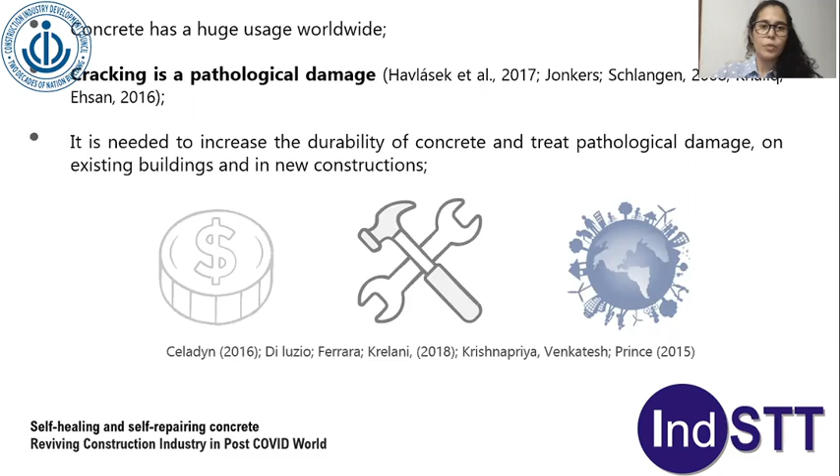Concrete has huge use worldwide, and cracking is a pathological damage that may lead to severe deterioration. There's a need to increase durability to save money, avoid reworks, and make structures sustainable. Studies of mechanisms that can act on concrete, creating products that heal cracks, led us to self-healing and self-repairing concrete.

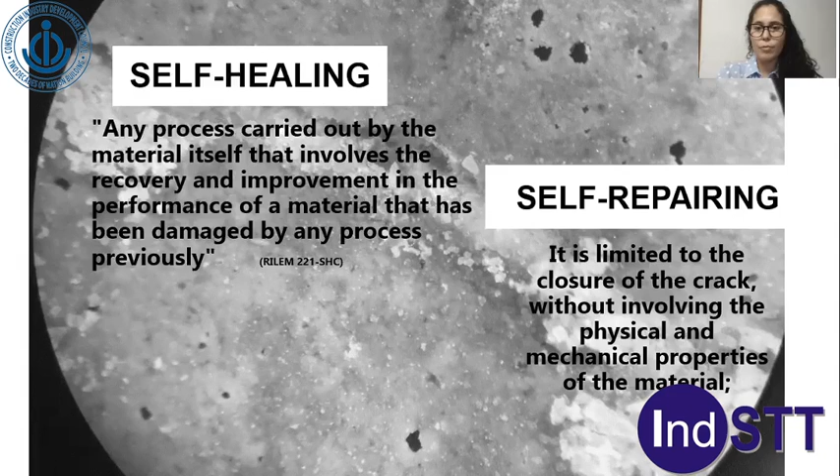These are divided because self-healing is considered as any process carried out by the material itself that involves recovery and improvement in the performance of material damaged by a previous process. Self-repairing is limited to closure of the crack, and doesn't involve physical or mechanical properties.

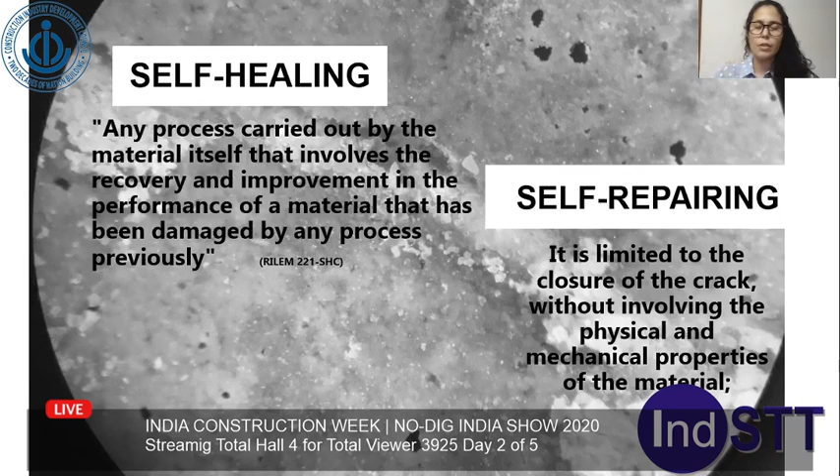Self-healing mechanisms can be autogenic or autonomous. Autogenic uses materials already in concrete, like cement or pozzolanic materials. Autonomous involves putting materials into concrete specifically for healing capability, like chemical compounds or bio solutions. This classification is based on the materials needed for the process.

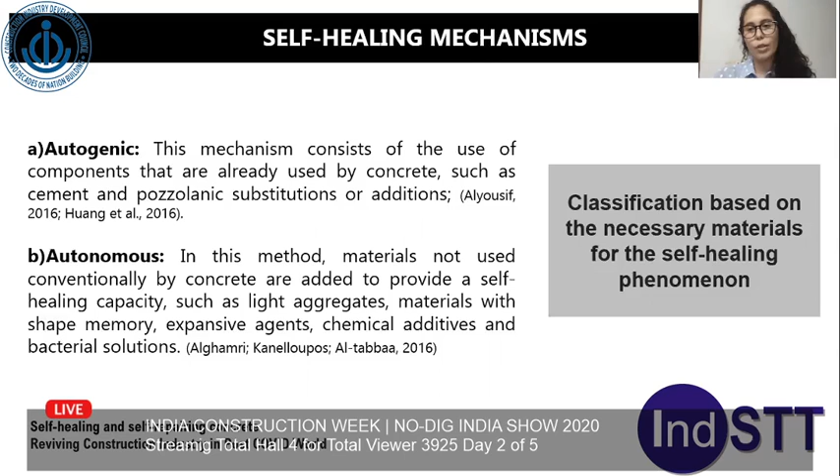Mechanisms have requirements to occur. There's a need to evaluate if they work in real structures or real exposure conditions. There's influence of curing conditions, need for analysis of reliability, and whether the mechanism can work in multiple cracking. Different mechanisms have different maximum crack thickness they can work within.

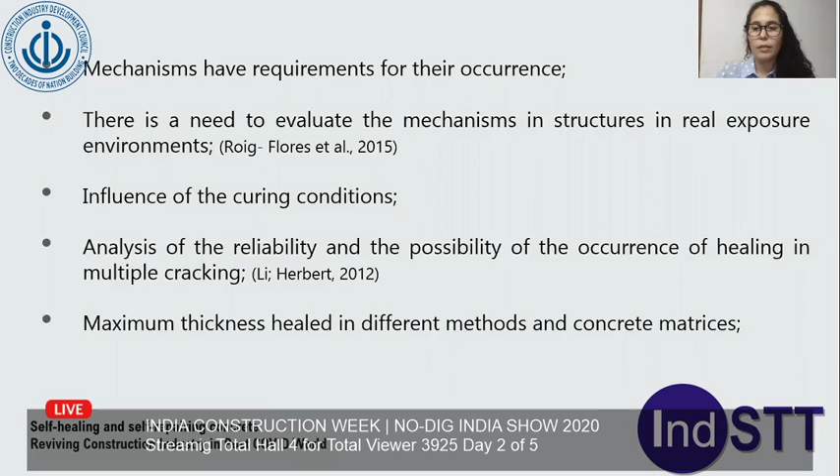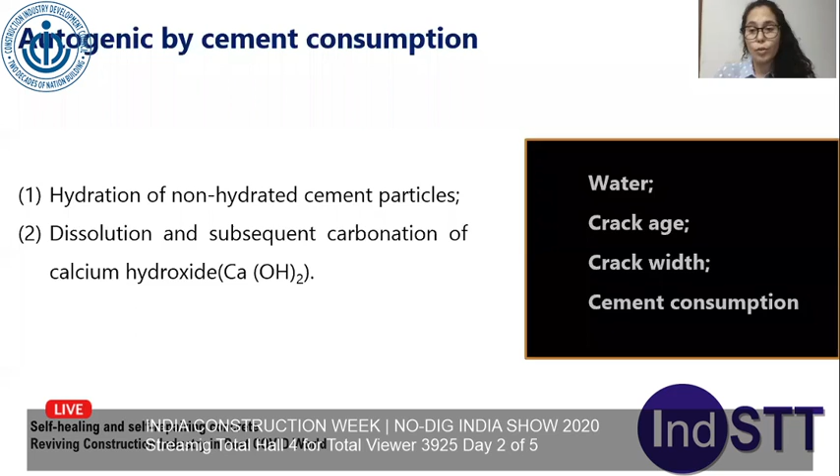Self-healing mechanism: autogenic by cement consumption. We have two options: hydration of non-hydrated cement particles, and dissolution and carbonation of calcium hydroxide. This mechanism is influenced by water, crack age, crack width, and cement consumption.

We also have autogenic healing by the use of pozzolans. They react with calcium hydroxide and water, promoting CSH formation. This is related to cracking at early ages, when pozzolanic reactions still occur.

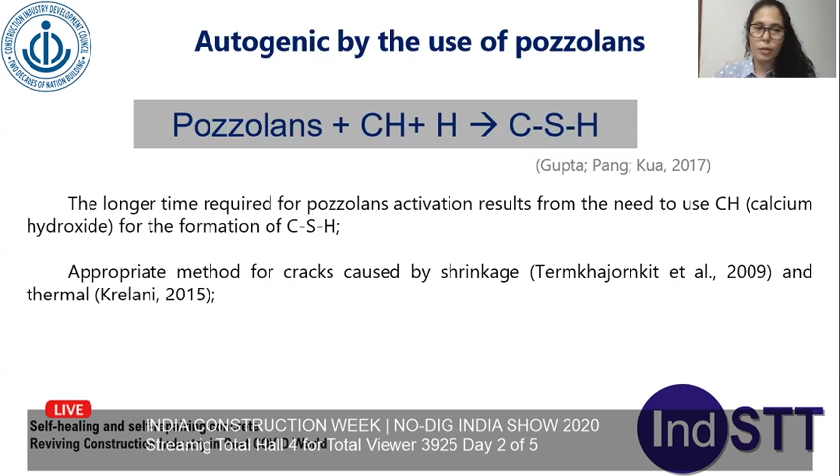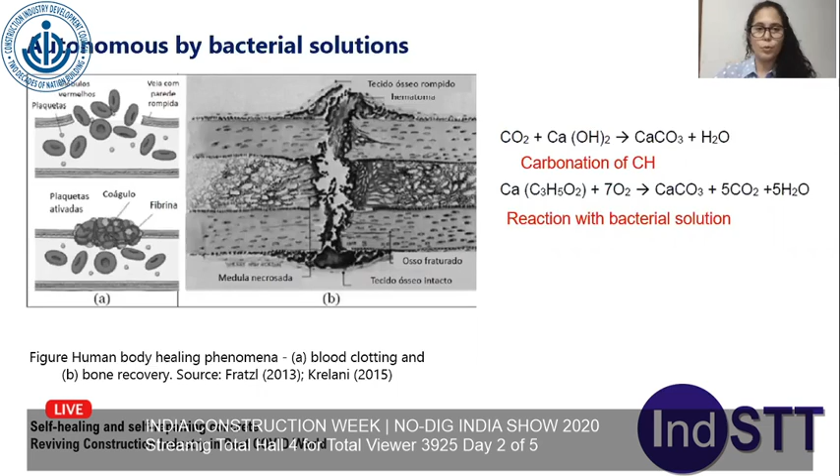We can also have autonomous healing via bacterial solution. It works similarly to human body healing, like blood clotting and bone recovery. The process that usually occurs is carbonation of CH and reaction with bacterial solution. We have to choose the bacteria; in Brazil we use Bacillus subtilis AP91, which is proven to produce carbonate and can be used for concrete biocementation.

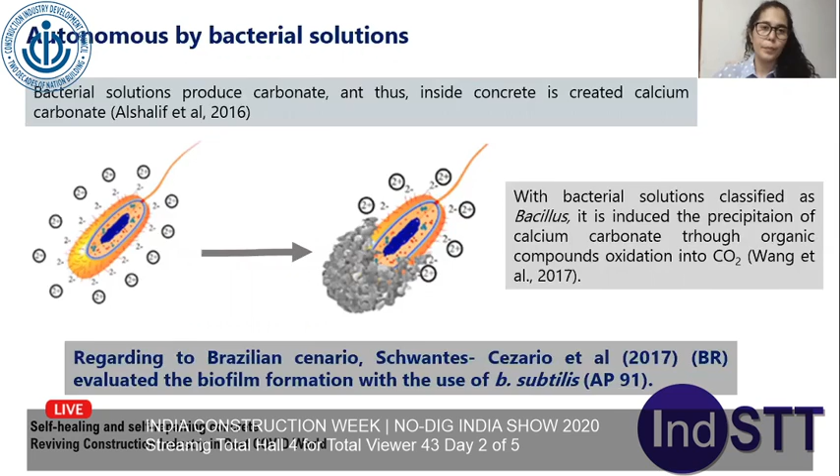We also have the option to use chemical solutions, usually commercialized ready for use, such as sodium silicate. It also reacts with cement compounds and can promote CSH formation.

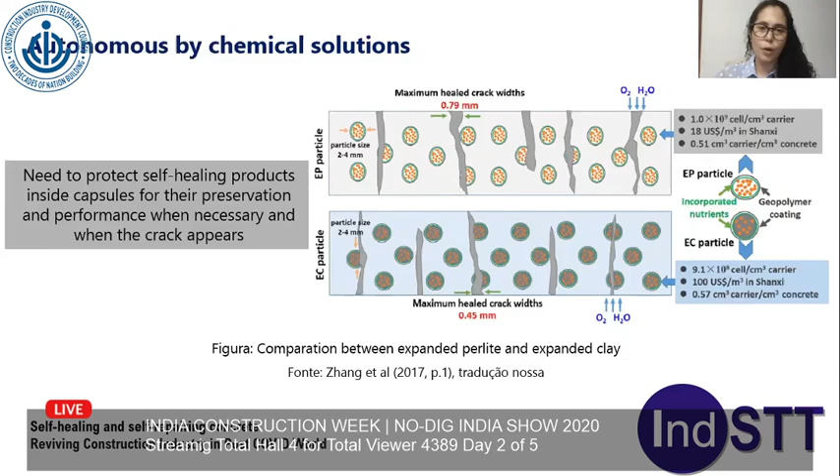To use bacterial and chemical solutions, we have the option to use capsules to hold these materials, such as expanded clay or expanded perlite. One study compared those two aggregates and discovered that perlite works well for healing. There's also the option to use or not use a vacuum chamber to put materials inside those capsules.

Some authors pointed to conditions related to the environment where the structure is, and the cure. They pointed out that marine environment works well for healing. Palin, Wiktor, and Jonkers cured samples in marine water and potable water, and discovered marine water works better.

Related to carbon dioxide, carbonation reduces the pH, which is better for bacterial survival. Yildirim and other authors aged ECC for 1 year and discovered that carbon dioxide works better for the cure condition. Roig-Flores say there's a need for water, and Luo, Qian, and Li say wet condition is better than wet-and-dry, which is better than only humid condition.

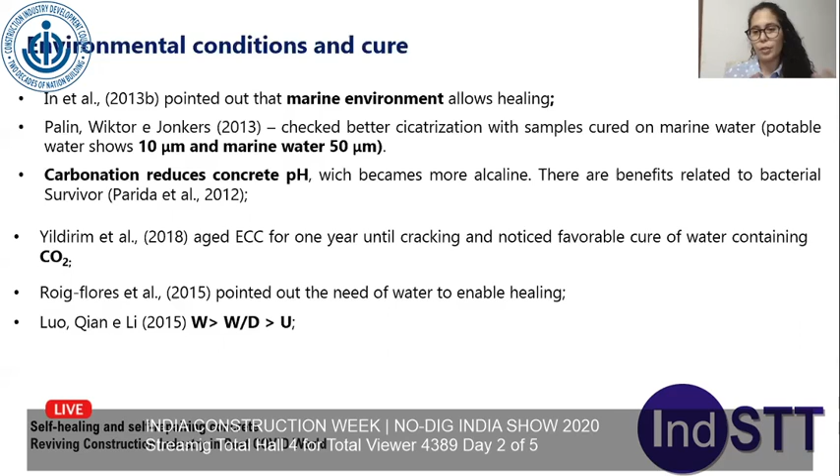We have procedures for concrete cracking, such as putting materials in the fresh state, putting the samples on the stove to induce cracking formation by heat, cutting the samples, or doing the flexion test.

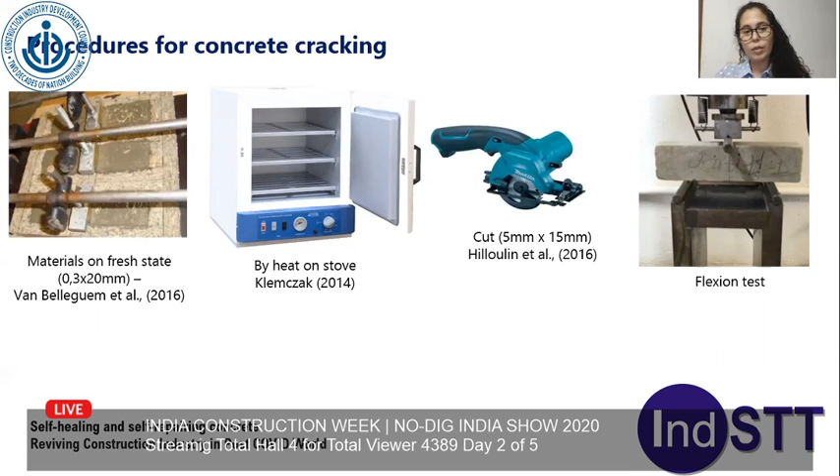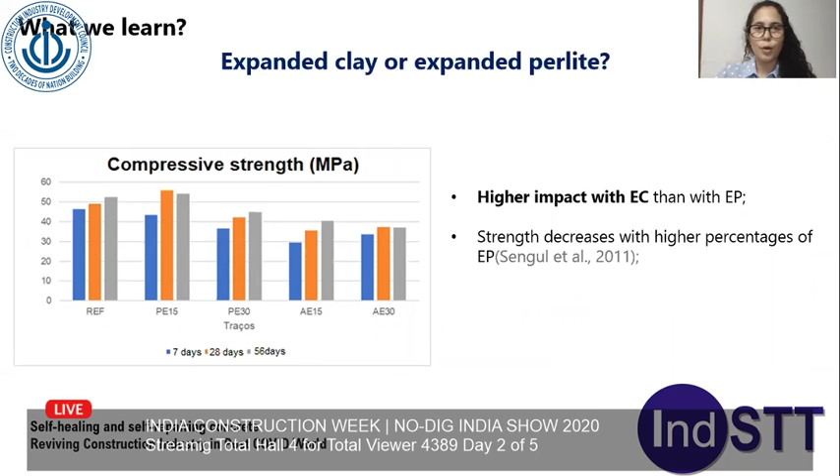Also, to check if the healing and repairing is working, we use chemical, physical, and image analysis. In our research group here in Brazil, we compared expanded clay and expanded perlite from Brazil, and checked that expanded perlite has much more voids, so it may be better for holding the chemical and bio solution. Also, there's a higher impact when we use expanded clay than expanded perlite, so expanded perlite may be better to not damage the concrete properties. By microscopy image analysis, we checked that expanded perlite is better to conduce the continuous healing inside the crack.

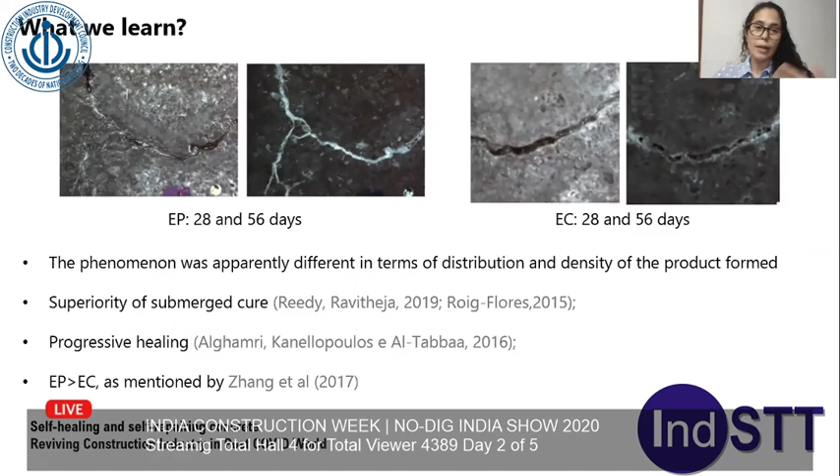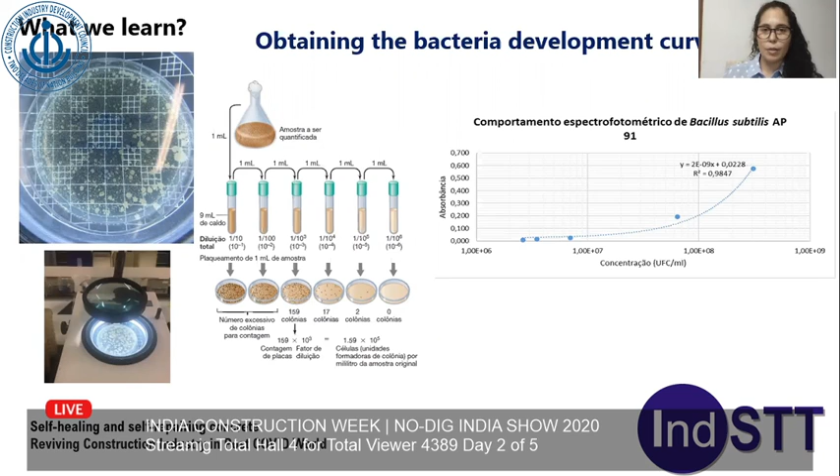We have to choose the bacteria, and also obtain the bacteria development curve, so we can choose the solution we use in every sample. We know there's an influence of bacterial solution on the capability to produce calcium carbonate, for example. So we checked solutions with concentrations of 6, 7, and 8 UFC per ml.

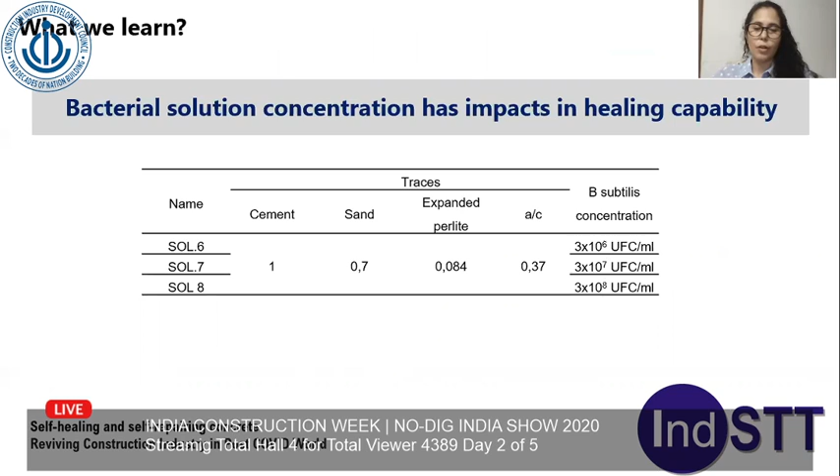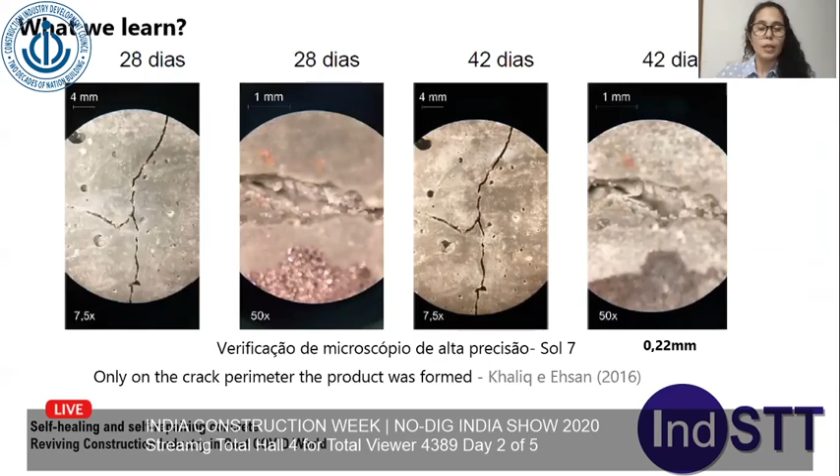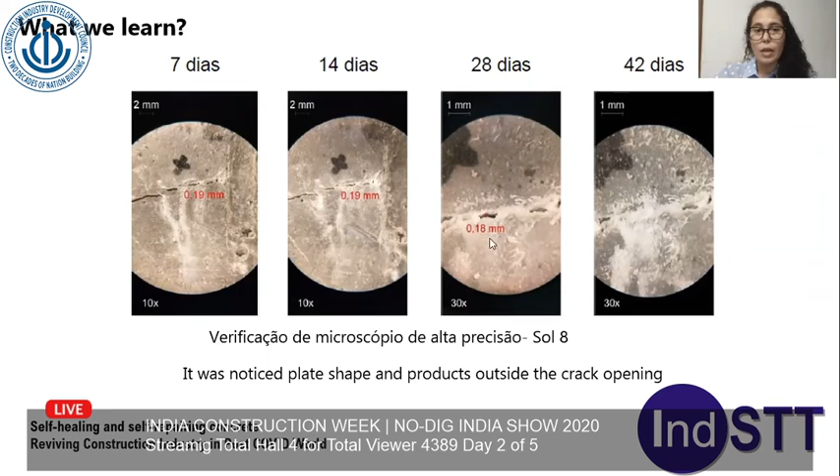With solution 6, we found progressive behavior, and it was able to heal cracks of 0.46 millimeters. With solution 7, the product was only formed on the crack perimeter, with values of 0.22. With solution 8, the product was found inside the crack and on the surface, with a maximum value of 0.19. There are different mechanisms.

We have environmental impact and healing capability to be analyzed. So we did a huge experimental procedure, analyzing cement consumption, for example, and it was able to promote continuous healing with a crack of 0.59 millimeters.

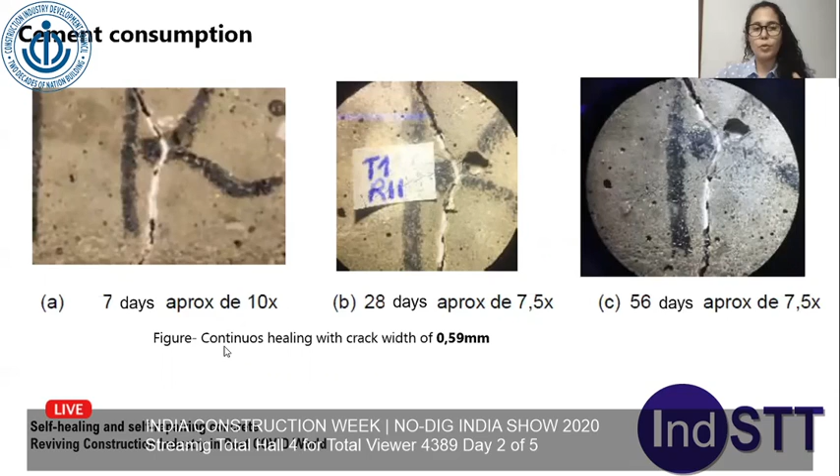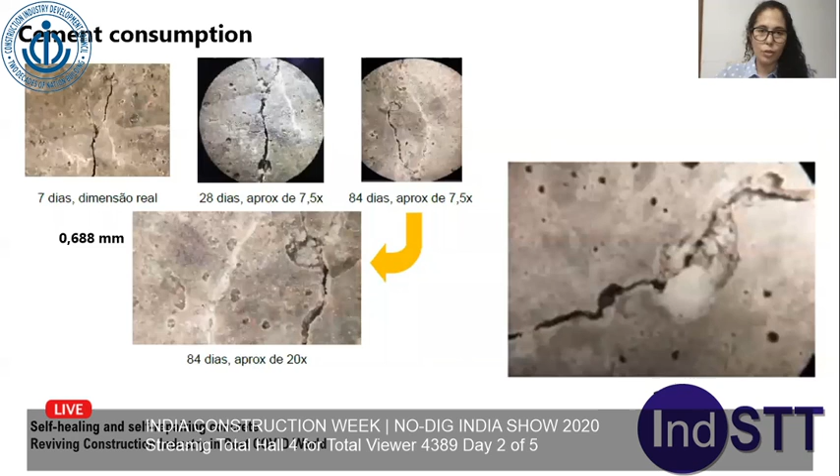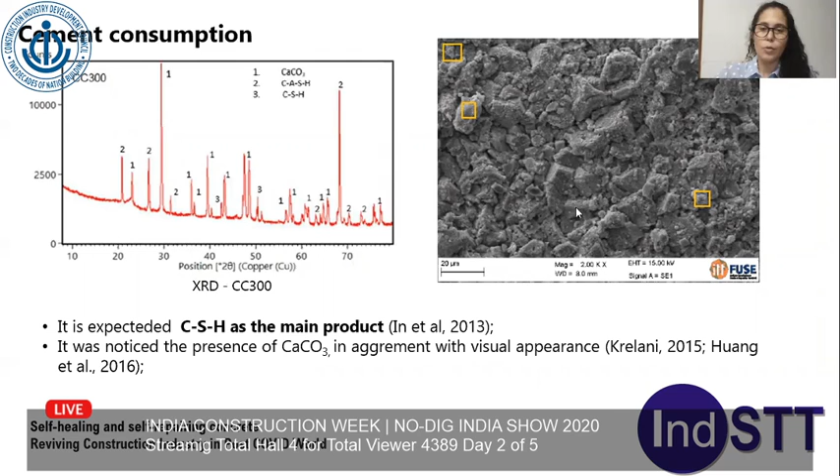We did XRD analysis and checked that there's C-A-S-H, C-S-H, and calcium carbonate. Also, the shape is okay with what was expected. With pozzolanic materials, we checked that the product was mainly formed only on the crack perimeter, with a width of usually 1 millimeter.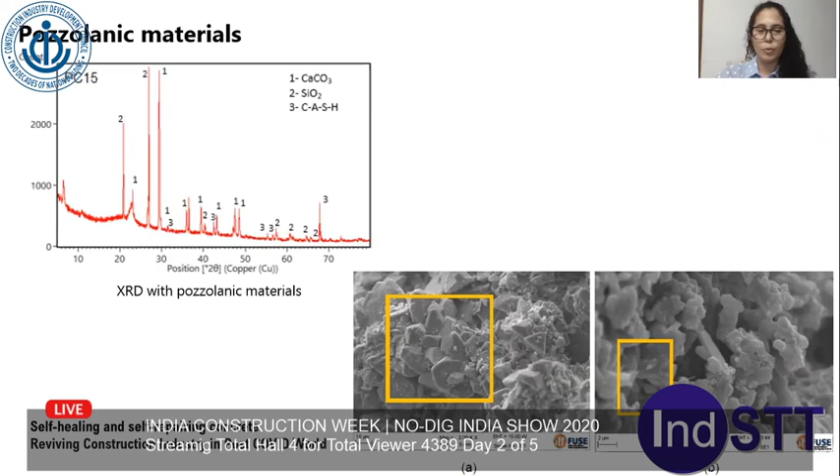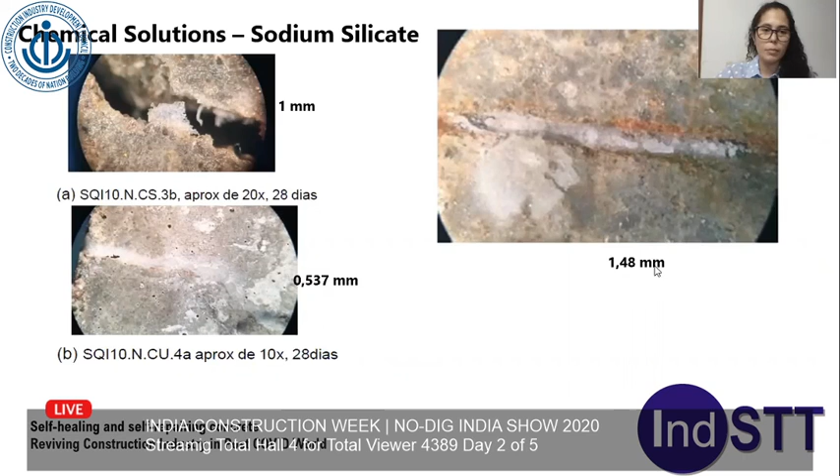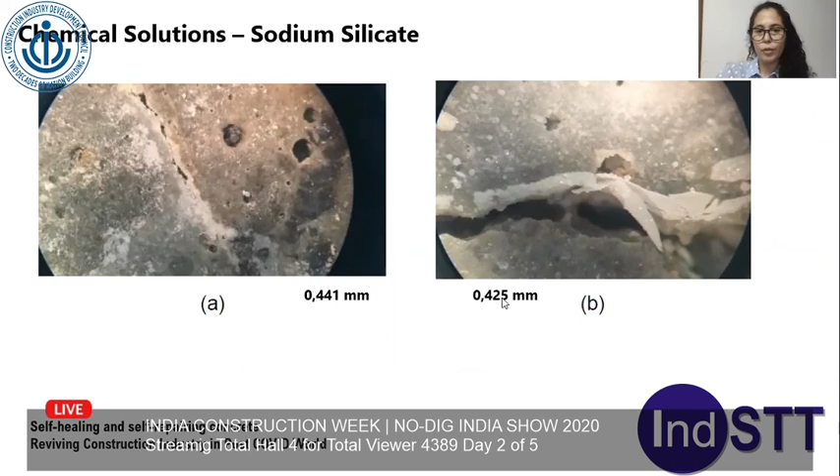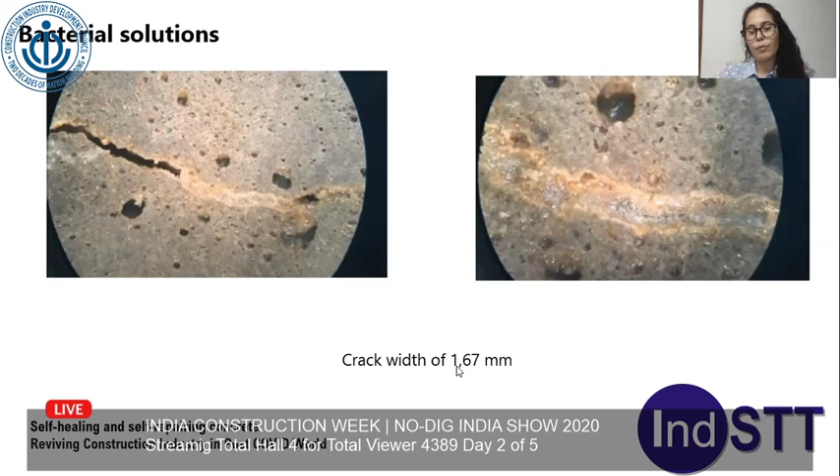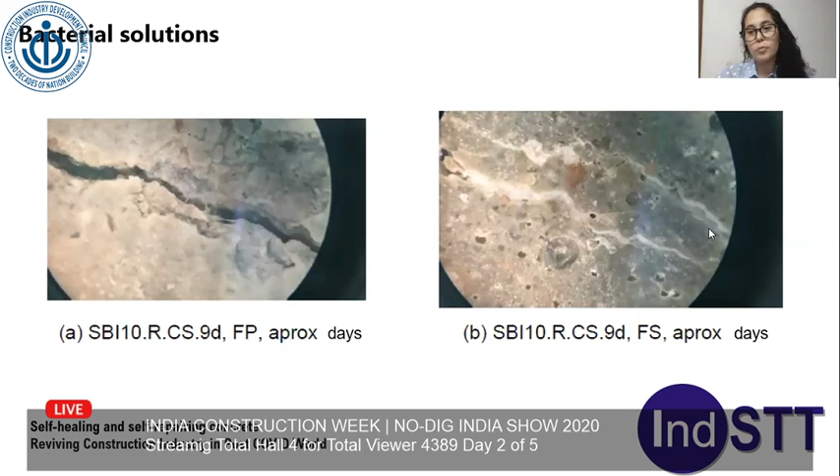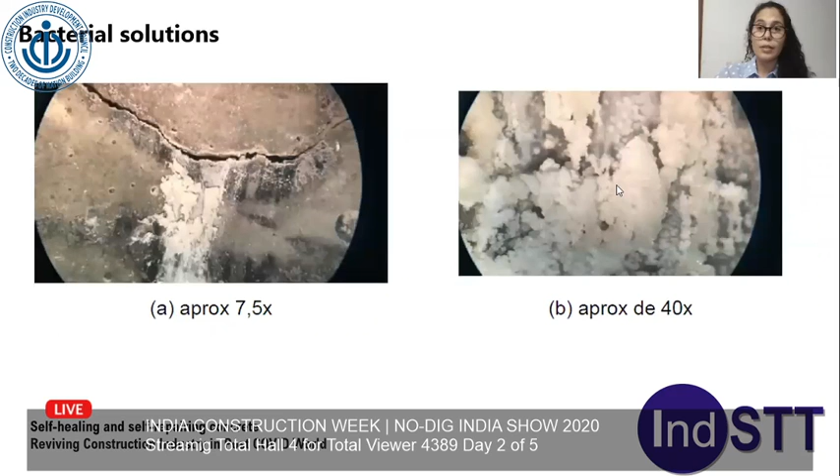From bacterial solutions, we have the crack completely healed with 1.67 millimeters. We also have continuous healing from small to bigger cracking, with solid material filling the continuous crack. There's a common occurrence where the material is not only inside the crack but also on the surface of the samples. We can check those phenomena.

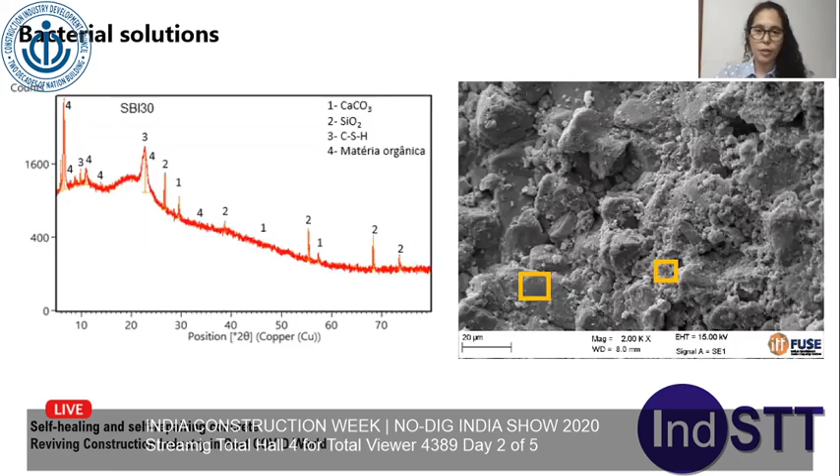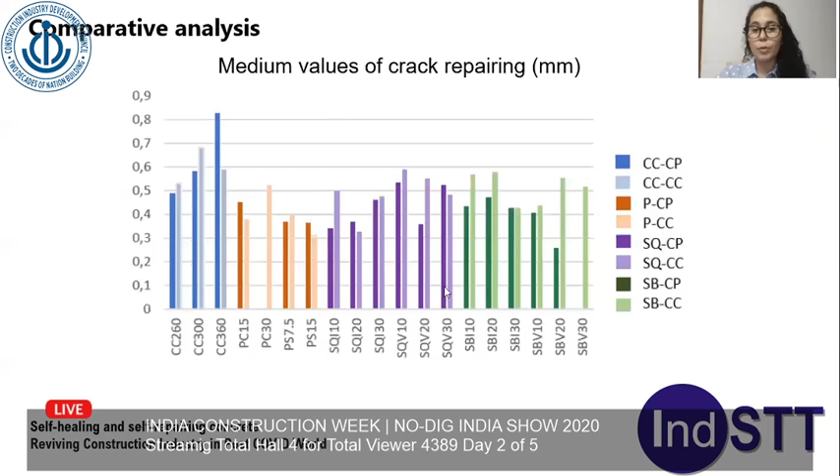We can see the good behavior from chemical and bacterial solutions. For the maximum values, we reach values above 1.6 millimeters for bacterial solution, which is really good considering the real cracks in structures.

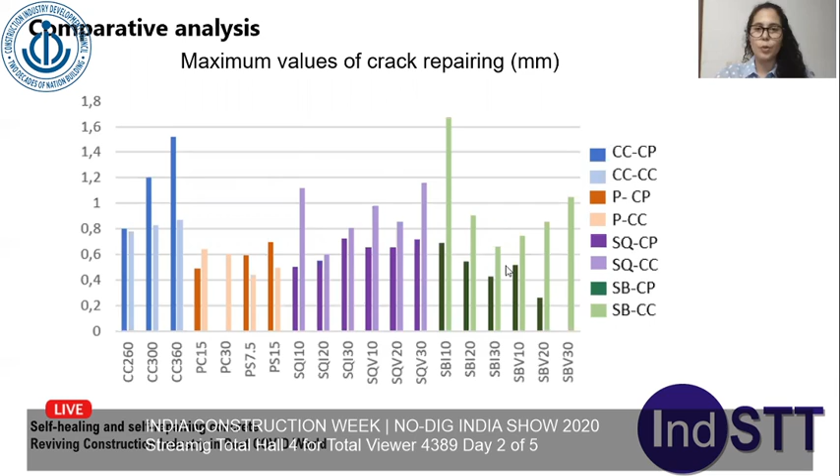This is the data that we obtained in this research, and I will be glad to share it with you if you have interest.

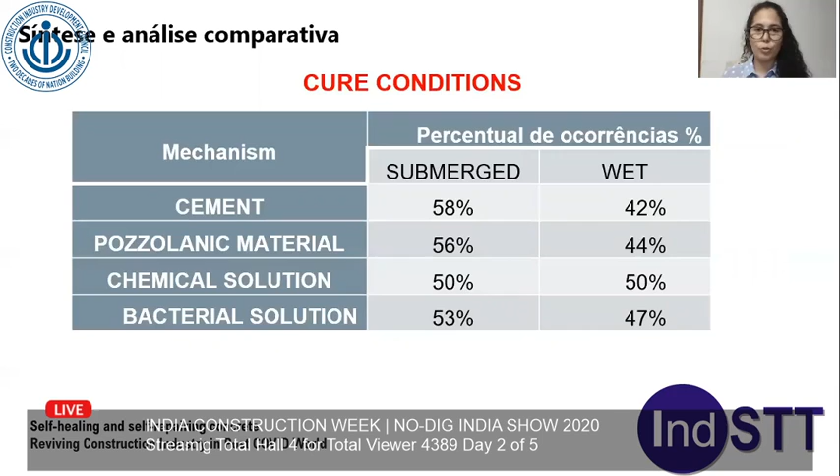To finalize, we analyzed curing conditions and checked that submerged is better than only wet for cement, pozzolanic, chemical, and biologic solutions. So that may be a condition for self-healing to occur.